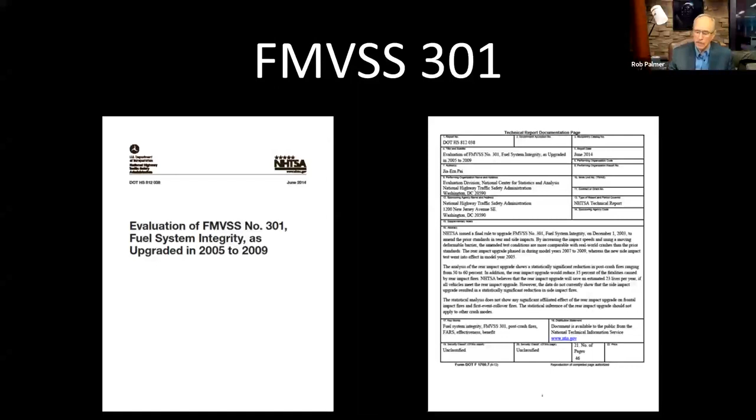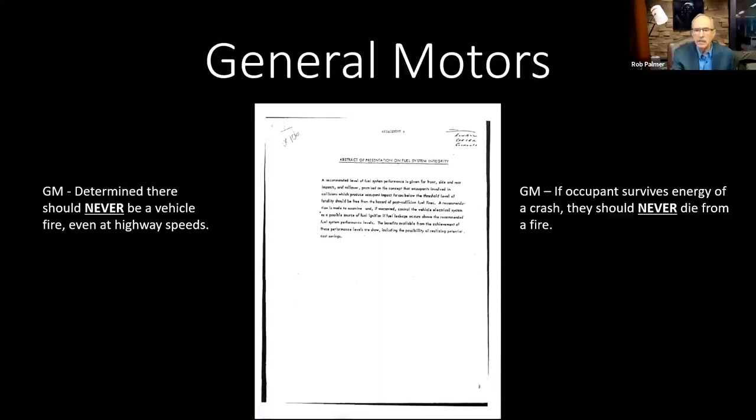General Motors has probably said it best of anyone. They point out that at highway speeds—this document is from the 1970s—there should never be a fire, even at highway speeds, and we're talking 70 miles an hour back then. They also pointed out that no one should ever die by fire if they survive the accident or the crash. So that's the standard right there: if they would have survived the crash, then they should never die by fire.

Here are the things you're going to be looking for in a fire case. First, it can involve any vehicle, from a semi-tractor trailer truck down to the smallest vehicle on the road, so it can be any type of vehicle. Then you want as little fault as possible on the victim. And then it requires these cases to be viable, requiring fatal or severe burns.

Many times the severe burns are actually worse than dying by the fire, because of all the horrible surgeries and pain they go through and all the limitations they experience for the rest of their life. The final of the four points is that they must be injured or die from the fire and not the crash, so you need evidence that they were alive post-crash—for instance, yelling and screaming, moving around. Lots of times when we do autopsies, we find smoke damage in the lungs, which means, of course, they were continuing to breathe after the accident.

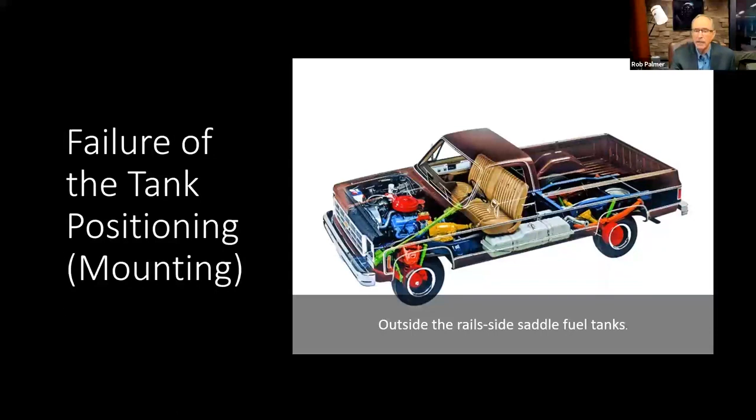Now, why do we have fuel fires? Well, there are several reasons, the first of which is where they mount the tank. This is a classic side-saddle fuel tank design from the 60s and 70s. As you can see here, the gas tank—the object in white underneath the driver's seat—is the gas tank, and it's fully exposed to a side impact if the vehicle is hit, because it's outside of the frame rails.

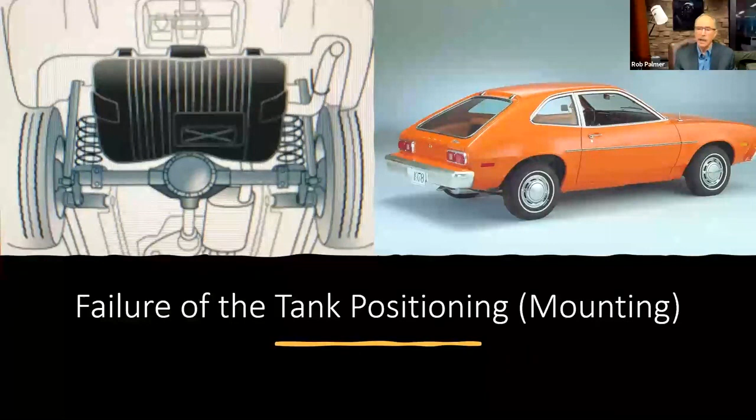So if the vehicle were hit from behind, it was like a bomb, and it would explode into flame without allowing any time for the occupants to get out of the vehicle.

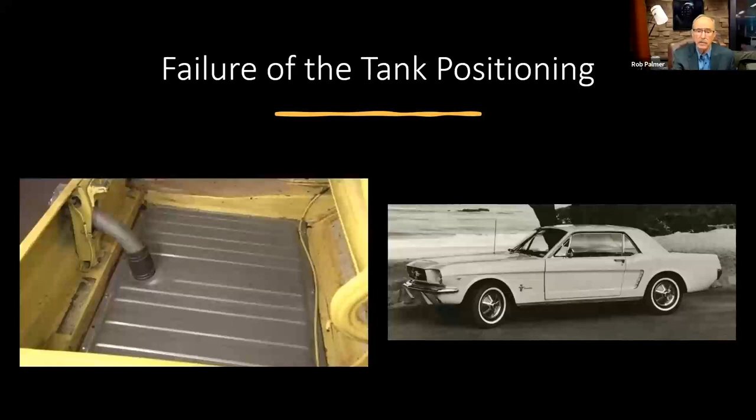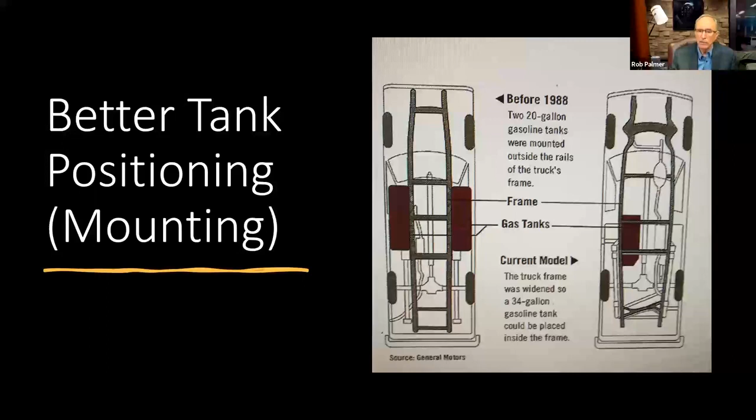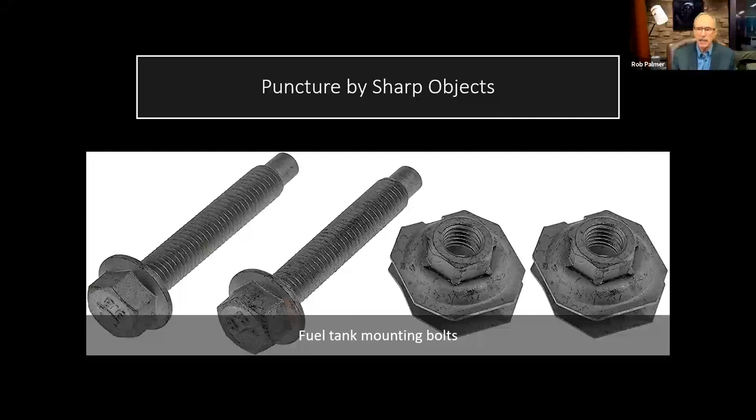Another cause of tanks failing in accidents is sharp objects in the vehicle. These are fuel tank mounting bolts—they will rip through a tank and tear it open in an accident. There are easy ways to address these things so they won't rupture the tank.

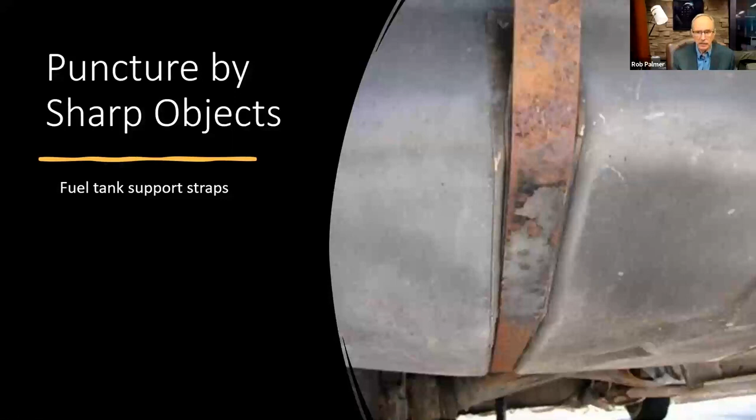These are fuel tank support straps. If they're designed improperly and embedded in the tank like this, they can actually shear or tear the tank if it's moved violently during an accident. That's another object that can puncture the tank.

Another object is the leaf spring mounts—those are the items in red on the lower side. When I found this photograph, I noticed those hanger bolts in the middle, the small circles. That long protruding bolt can go right through a tank, and that's another issue that can occur.

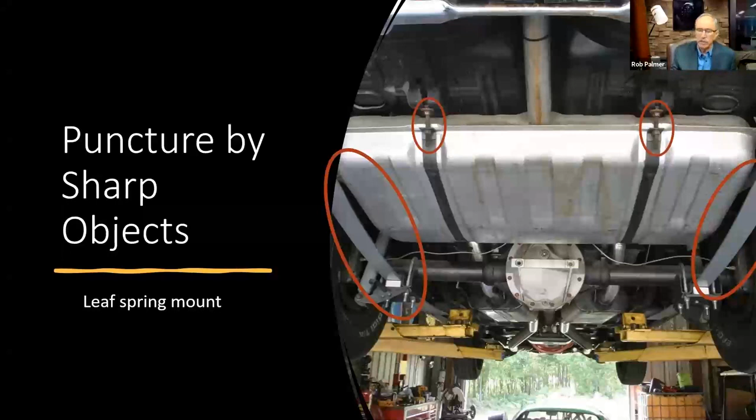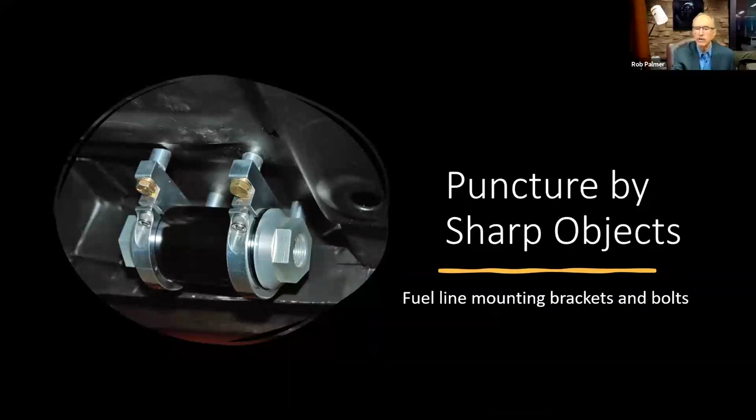This is just a fuel line mounting bracket that would also rip right through a tank, so they have to be protected. A lot of thought has to go into where you mount and protect the tanks, which certain vehicles do a very good job of.

Here are some classic ways to guard or shield tanks. As you can see in all three cases, the items below are tank guards that cover and shield the tank so it can't be ruptured. These are sometimes called skid plates or other names, but they're designed to protect the tank in the event of a collision, especially from the rear. They're extremely effective, but unfortunately, even today, a lot of vehicles have no guards on their tanks.

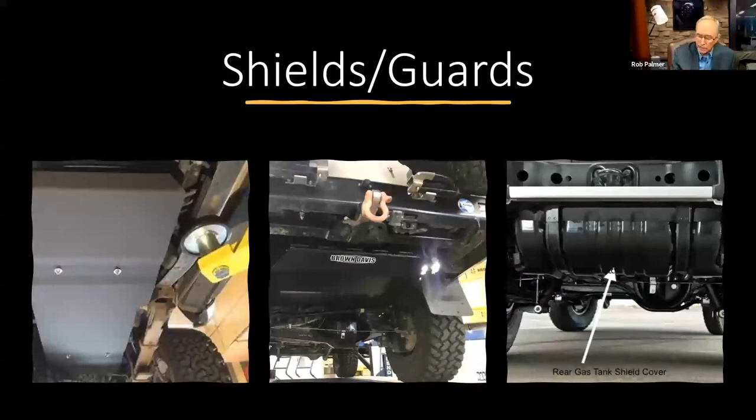It's also not just gasoline that causes fires. It's also the engine fluids, oil, even windshield washer fluid. Other things are combustible because they have alcohol in them.

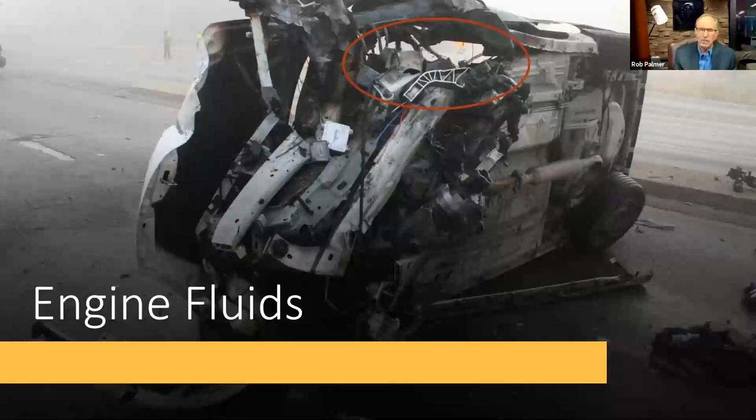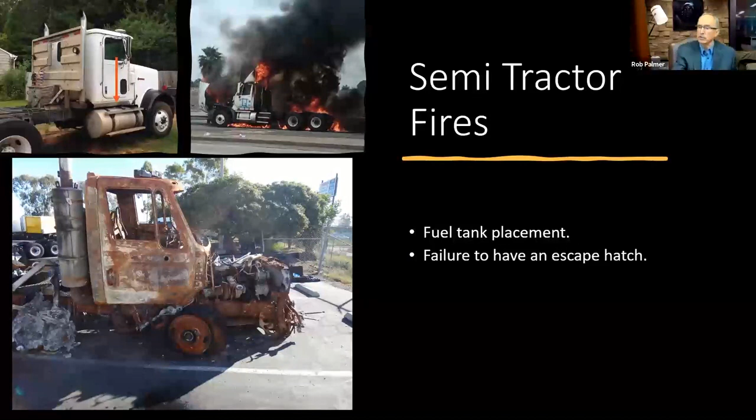People don't appreciate that semi-tractor trailer trucks don't have escape hatches. So there's been a whole series of litigation because of the failure to have escape hatches. And now many brand new semi-tractor trailer trucks have escape hatches on the roof and on the bed of the tractor, so if it tips over or is on its side, you can open it up and get out in case of a fire.

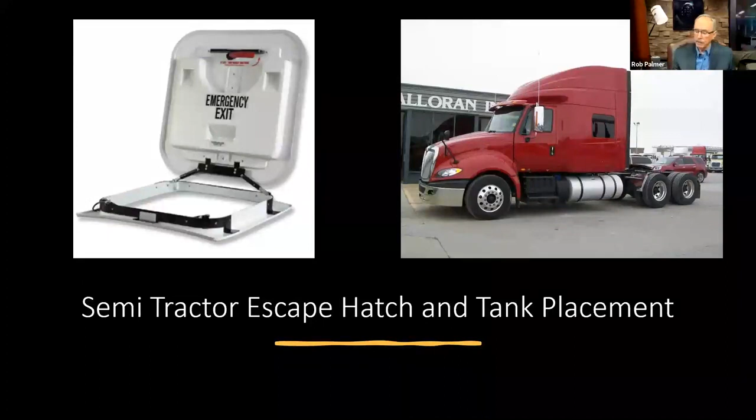As I mentioned, there's been a series of litigation on these issues. Now, what do you do if you have a fire case? As I've already mentioned, there should never be fires in a vehicle. And if you do have a fire in a vehicle and someone gets seriously hurt or is killed, you need to preserve the vehicle because there's a very high likelihood of there being a good crashworthiness case.

Do not accept any offer of settlement until a product case has been completely ruled out. I do understand that sometimes the energy in the accident is just so high that there's nothing any design could have done to prevent it, but that is rare.

When you find the vehicle, and lots of times they've been severely damaged and burned, take numerous photographs from all sides of the vehicle and do everything you can to make sure, as I mentioned above, that the vehicle is secured. Take time to call us. We're glad to evaluate any case that involves a fire.

You need to do all of the above as quickly as possible, not just because a statute may run, but because especially in fire cases, the vehicles are usually stored outside and the elements, rain and snow, will degrade the evidence and degrade the viability of the case. So it's very important to get on these cases as quickly as possible.

And if you have a case like this, don't hesitate to contact myself or Eric Jensen, the Auto Defect Division. We'll be glad to look at your case. Thank you very much.